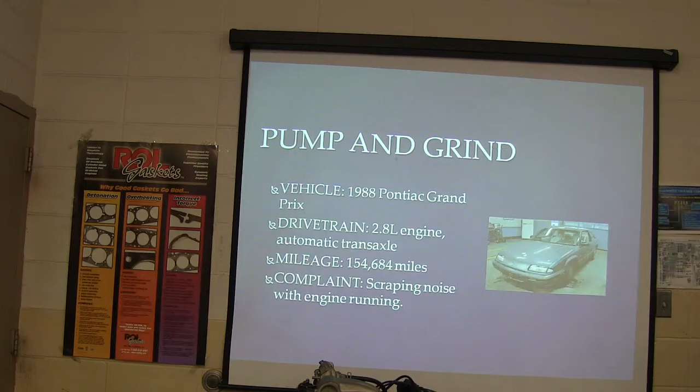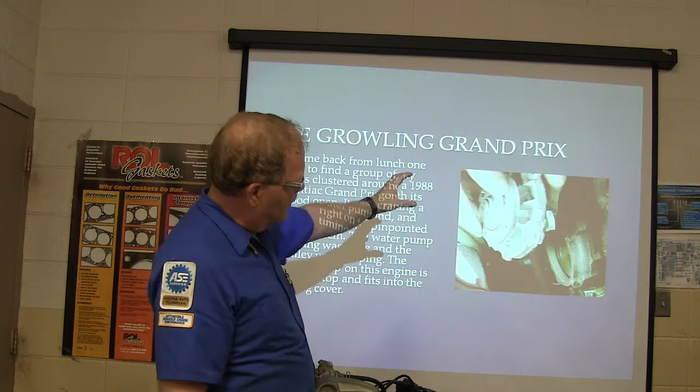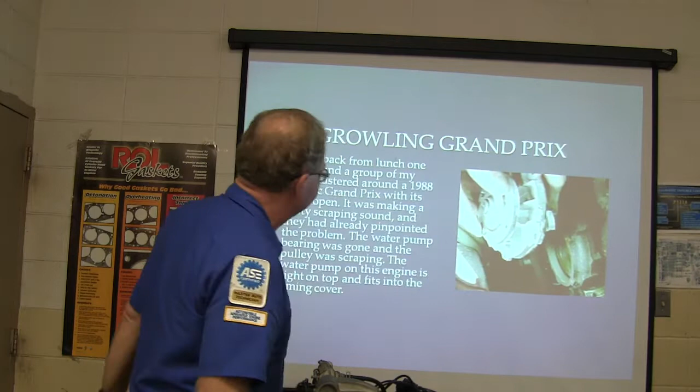The scraping noise he had was that cup-shaped pulley on the pump actually dragging on the metal housing of the timing cover, because the bearings were gone in the water pump. That's what was making that ugly sound. He had no other issues except for this noise.

Think about that now, nothing else was going on except the noise, right? So the guy gets the water pump off, takes a look at the timing cover because it spins next to the machined surface. There was a little scoring where the cast iron impeller on that water pump pulley had contacted it, but it still looked serviceable.

So we went ahead and put the water pump in there, which is right up on the top, easy to get to. You can change a water pump on one of these cars in like 15 minutes, which is real simple. So the coolant takes a little longer.

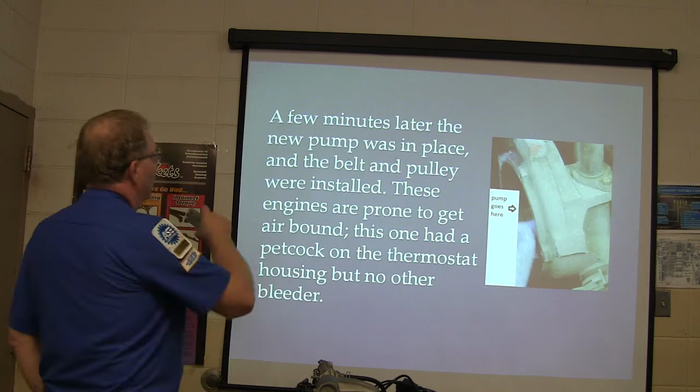A few minutes later, the new pump was in place, and the belt and pulley were installed, and these engines have got a little air-bound issue. That's why they got bleeders on them.

Whenever you're filling an engine up with coolant, make darn sure that if it's got bleeders, you use them appropriately. What the bleeders do is, you loosen them typically, and pour the coolant in until it pushes all the air out of the block and it's coming out the bleeders, then you tighten them up. You don't use the bleeders while the engine's running, just when you're pouring coolant in. Make sure if it's got bleeders, you're aware of it.

Because if it doesn't, and you remember what I told you about the Pathfinder, when you gotta put that motor in that Pathfinder and fill it up with coolant, you gotta jack the Pathfinder way up in the front, because all the air will come up to the top. If you don't, you won't ever get it all out of there. And that Pathfinder's a peculiar deal anyway.

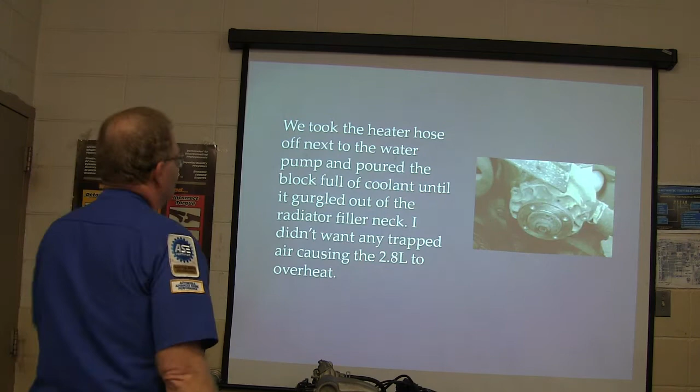So we took the heater hose next to the water pump and poured the block full of coolant. What we do is take a heater hose off, since I know it goes into the top part of the air cavity in the block. Sometimes I'll use a little funnel, pour coolant in there, holding that hose up until it fills all the way up. If you can do that, it works really well. You can't do it on every vehicle, but on that particular one, we did.

Didn't want any trapped air in it, causing it to overheat, trying to make sure everything's okay. So the owner came walking back in the shop just as we were warming it up, waiting for the thermostat to open. So how do you know when the thermostat's open?

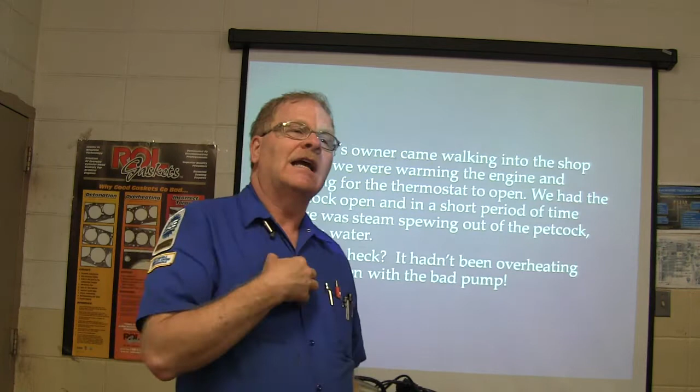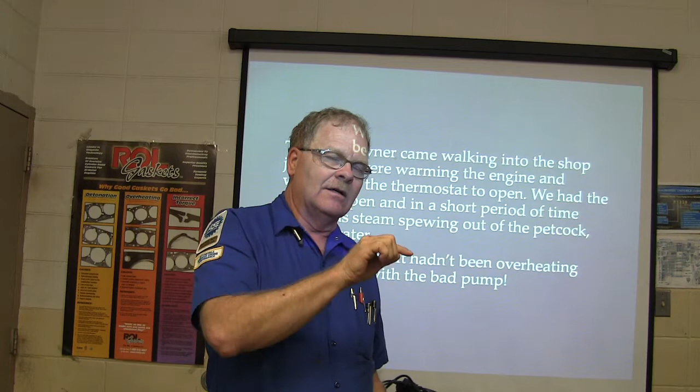Just select that and nothing else, so you have a good high resolution reading. What are you going to see on the scan tool? Just get higher and higher, and then it'll drop, and then it'll go back up, and then it'll drop, it'll go back up.

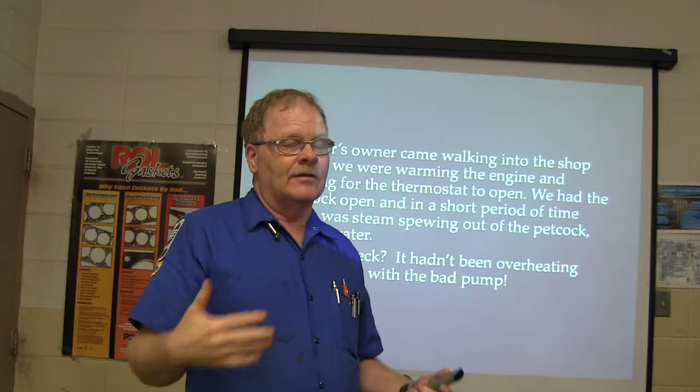Also, your coolant fan, if it's got an electric coolant fan, will kick on and off, on and off. Now what happens if you're watching your coolant on a scan tool, and the coolant fan kicks on and stays on, and it keeps getting hotter and hotter? You still have a problem.

Did you get it hooked up? No, no one's been here yet. Did you stay dry? Partially. What?

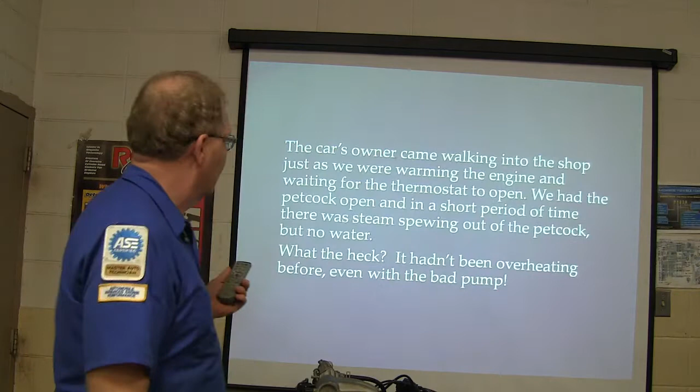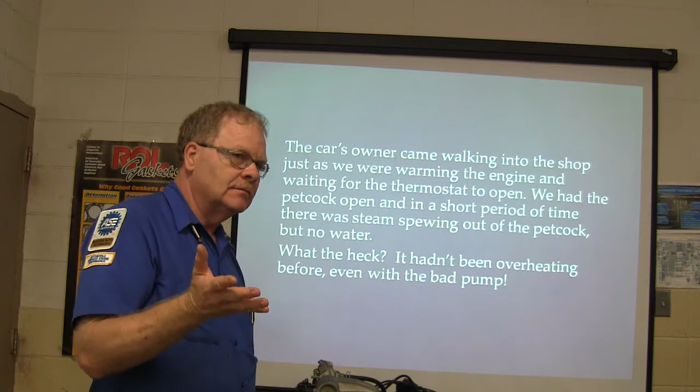It's overheating now. It wasn't overheating before we put a new water pump on it, or a rebuilt one, or whatever. We put it on there, and now it's overheating. Did we cause that? Well, it didn't overheat before, but now it is. Can you think of anything? All right, parts girl, you're supposed to know.

Because it even had the fortitude to do it, because it's a pretty tough little engine right there. The steam escaping from the thermostat didn't smell like a blown head gasket.

What does a blown head gasket smell like? You smelled one, hadn't you? Stinky sweet smell. And it's punching water out while it's sitting there running.

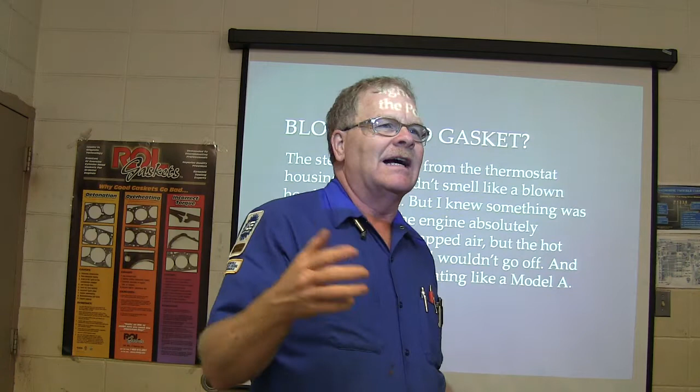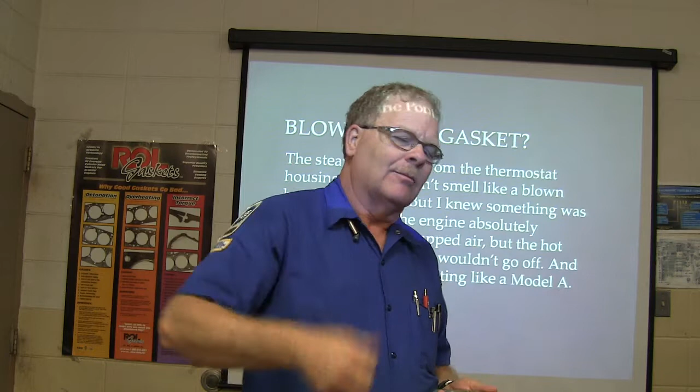The funny thing about that, when we got that Bronco, the guy said it had a blown head gasket, so he donated it to the school. It would run for a while, and it sounded like it was kind of skipping. It wasn't quite running right, but it was running almost right, but it would start punching the coolant out. And you know what I found out was going on with that one?

He had it wired up like a 302, and it was a 5.8. That was the only thing wrong with it. In other words, he wired it up 15426378. It's supposed to be 13726548. That'll be on a pop test tomorrow.

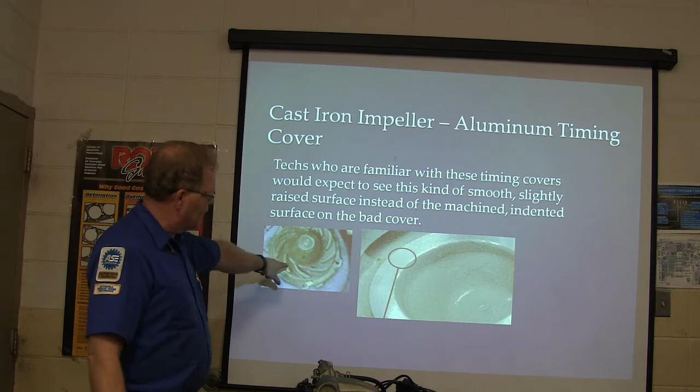But it was percolating like a Model A. So anybody that's familiar with these timing covers would expect to see this smooth, slightly raised surface instead of this machined, indented surface on the bad cover. See, this thing right here had a cast iron impeller, and because the bearings were worn out, it got in there too close and it chewed away some of the metal.

And so what we had, I remembered as I was thinking about this, back when I was working at Lincoln Mercury in 1984, this guy had this little Dodge Aspen, like the one you see in the picture there. He was a bookkeeper in the office, and so the seal was leaking and all that, so we ordered a water pump from the parts house. It was a little slant six, and I popped it in there.

And he came back and he said, my car's running hotter than it was before. Well, it had been running down, you know, kind of just above the cold line, which is where he wanted to see it, but now it was up in the middle. He said, I don't like it, before I said, well, it's full of coolant and everything. So anyway, he was insistent, he didn't like that.

So I pulled the water pump off of it. And on that particular one, there's two different types of water pumps, the way they're put together—basically two basic different kinds. One of them has the impeller pointed at the timing cover, and the other one has the impeller pointed at the pump, the blades of the impeller. There's some water pumps up there behind Nick.

But anyway, so what I did was when I pulled the water pump off and I looked at it, I was noticing a gap that looked a little bit wider than it should. It wasn't anything that would jump out and grab you, but I said, that looks like too much of a gap. So I got him to order another pump from the parts house, and there was about 50 thousandths of an inch difference between the first water pump I put on and the second one he sent. When I put the second water pump on, it ran cool.

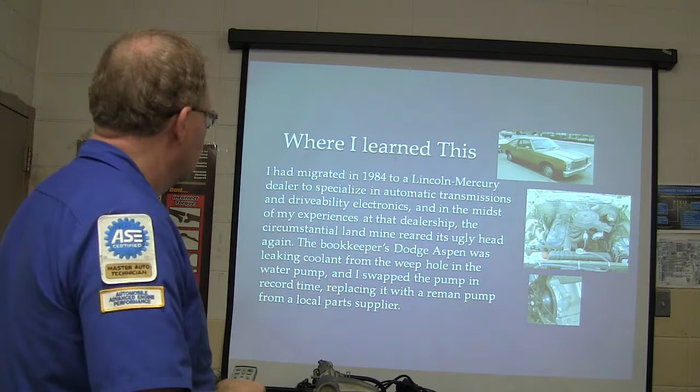All right, well the next day he showed me that temperature gauge. I test drove it and it ran between the midway point and the hot line, which wasn't gonna really hurt it, but he didn't like it running that hot.

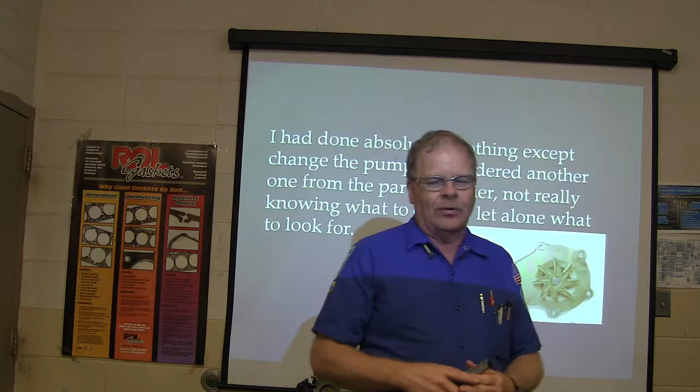All right, so what happened was when they rebuilt the pump, they pressed that impeller onto that shaft, and they didn't press it on there far enough. That's what the problem was. All right, so it was the difference—there was 70 thousandths of an inch from when I measured it with feeler gauges.

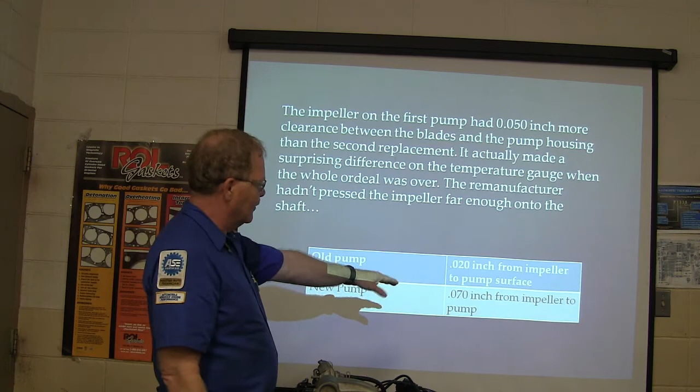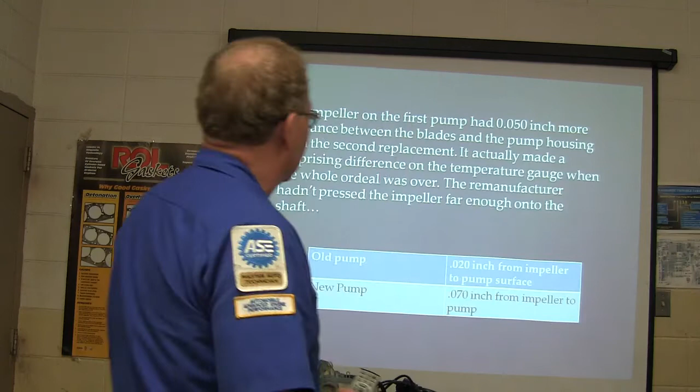You had to stack them to get that much—20 thousandths of an inch on the old pump, and on the replacement pump that was better than this first replacement pump. Now, this is something right here that will also happen in a situation where the water pump has been consumed partially by rust. Now, right over here behind Nick, this is a water pump right here that has been destroyed by rust, and there's too much space in between that impeller. Pass that around.

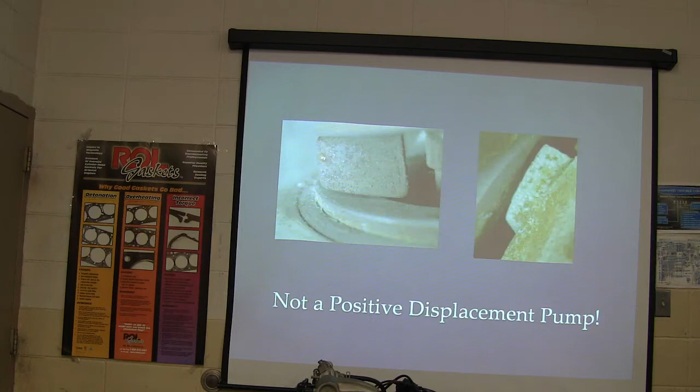Look at it. Now the way we found that particular one, that came off of a Ford Taurus. It wasn't running hot, but she was complaining that she had no heat. See how the rust has eaten away that impeller? That happens when somebody doesn't keep their coolant changed, or if you've got a bad radiator cap letting air come and go. It just makes a big, terrible mess of the cooling system. Long and short of it, she said, I've got no heat.

So what we did is we put a clear hose in the line between the two heater hoses, and we cranked it up, and there was no coolant traveling through there. The water pump is what pushes that. Okay? She's holding that up.

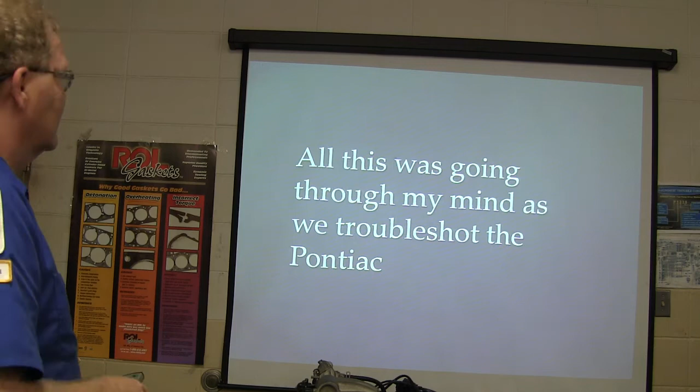This was going through my mind the whole time we were troubleshooting the Pontiac. I didn't really have a frame of reference. That looked just fine at first glance, but I found the worn out part had too much space there.

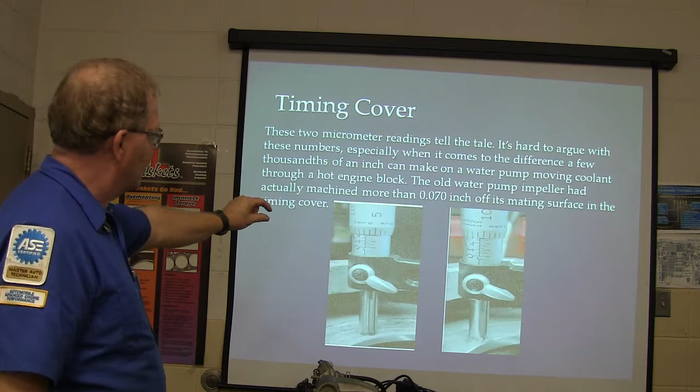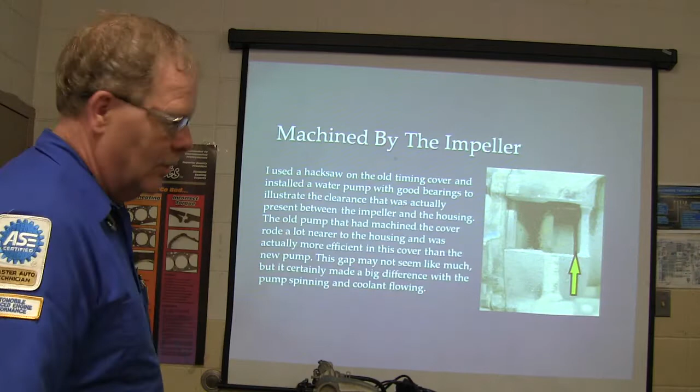So I got a micrometer, and I don't know how accurate this would be, but I noticed that this one here, when I got another timing cover off of an old engine we had back there that was the same kind of motor, look at the difference. See how much thinner that one was, ground off, and that one was smooth, and that one was kind of chewed up. But the water had lubricated that thing while it was machining it, to the point where it really didn't look that bad. So I used a hacksaw on the old timing cover and put a good water pump on it.

And you could see all that space in there.

Now, what is the difference between a positive displacement pump and a pump that's not positive displacement? Different displacements, huh? No, it's not that. Positive displacement means if you turn that pump, something's going somewhere. And if you stop whatever it is going, the pump will stop. Got it? You understand what I'm saying?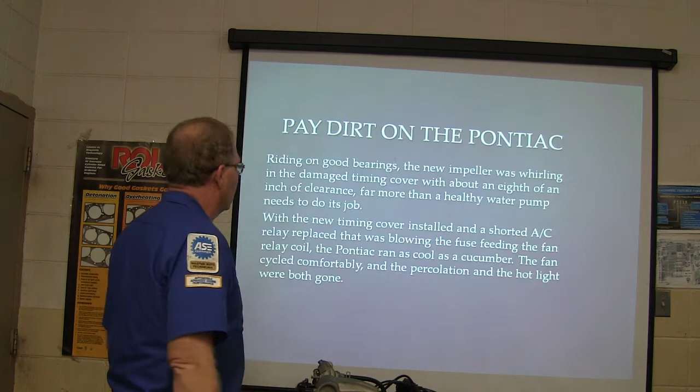But that one right there was a good one to keep. May not seem like much, but it made a big difference with the pump spinning and the coolant flowing, riding on good bearings. The new impeller was whirling in the damaged timing cover with about an eighth of an inch of space, but with the new timing cover it was a heck of a lot closer than that. That was the point.

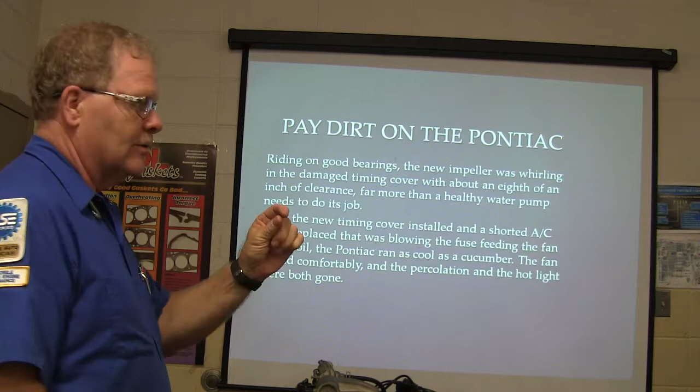Now, the ones that teach us the most are typically the ones that smack you around, the ones that you had trouble figuring out.

Now y'all are getting the sugar out of it, that girl brought her Armada in here, somebody put sugar in the gas tank. She was nasty about it. After you got the sugar out of the gas tank, how much did you get out of it? About a cup. About a cup of sugar out of it. Now, sugar won't dissolve in gas, so all it does is clog up the filters.

But she was saying she couldn't get about half a tank of gas in there, it was clicking off, but that was because the sugar they poured in there was clogging up the pipe going in. And that was a lot of gas in that tank though. You said y'all act like there wasn't much in there yesterday. Well, the long and short of it was, it's hard to tell when it's balancing on that jack, but it was a lot.

But I will tell you something else, you can't hit that tank and tell what's in it. I can't hit a gas tank and tell if it's got gas in it or not. It's not like water. She wasted all that money, because that had to cost her a good bit of money.

Well, not necessarily. What we would do is filter all that sugar out. She can still use the gas. Oh, really?

Yeah, because it doesn't dissolve. So, put some sugar and gasoline in a fruit jar and shake it around. It just settles to the bottom. It don't even dissolve. It ain't like water.

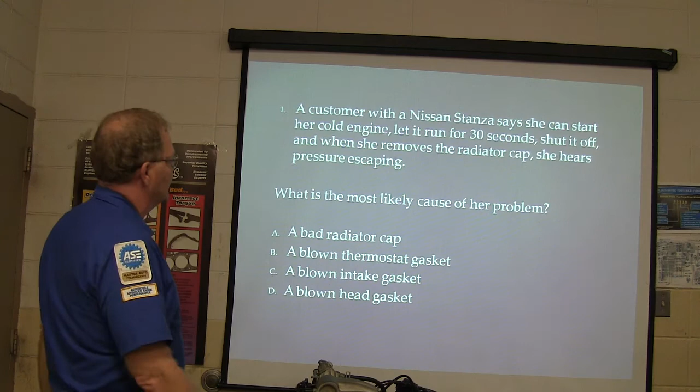All right, number one question. A customer with a Nissan Stanza said she can start her cold engine, let it run for 30 seconds, shut it off, and when she removes the radiator cap, she hears pressure escaping. It's been sitting all night, she starts it for 30 seconds, switches it off, takes the cap off, and there's pressure. What does that mean?

It makes pressure in the cooling system within 30 seconds after starting it when it's been sitting all night. Come on, intake gasket? Where would pressure come from that quick in the cooling system? Thermostat, radiator cap? No, the radiator cap's trapping the pressure, but the pressure's coming in there from somewhere. Where's it coming from?

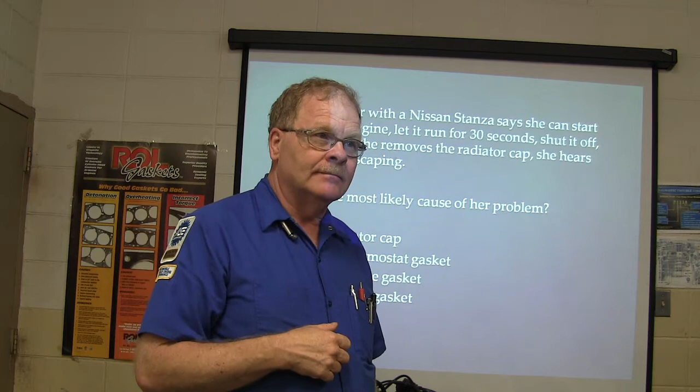Head gasket. Head gasket. Listen to Sierra, we got head gasket issues. Now, how many different ways can head gaskets blow? Do they always blow the same way? Nope, sometimes they blow between two cylinders.

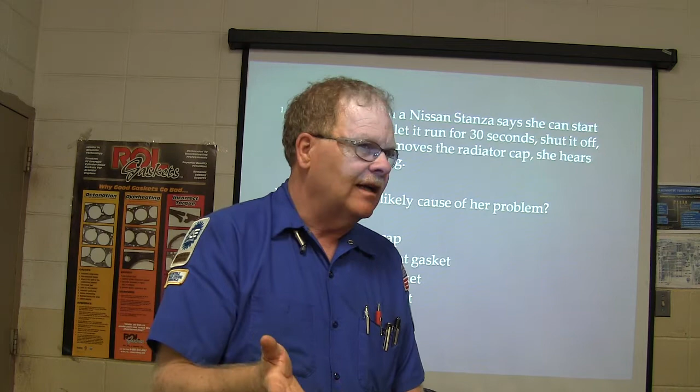Sometimes they leak oil if it's an overhead cam engine with the camshaft spinning in its saddles. If it's not overhead cam, it won't leak oil from under the head typically. It can leak coolant from under the head, but it can also leak coolant into the cylinder, or leak compression into the water.

Now let me ask you this. How are you going to find it if it's leaking coolant into the cylinder, and what kind of symptom does that cause? Smoke? No, it depends. If it's like this Dodge truck out here that's really getting a lot of coolant in there, remember the one we started up, the guy brought over here?

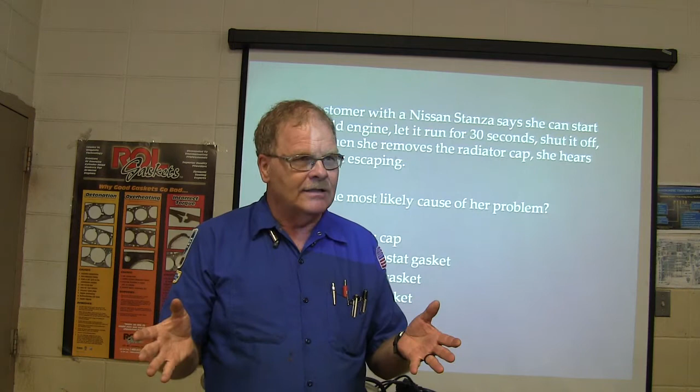It's going to have an engine with lots of coolant coming out there. The reason we're putting an engine in the Dodge truck is because the timing chain costs $500 something for a Dodge, for an engine like that. By the time, we don't know if he's got cracked heads or anything else, we may as well just pop another motor in it instead of taking it down and spending $1,800 putting the timing and all this other stuff on that motor there.

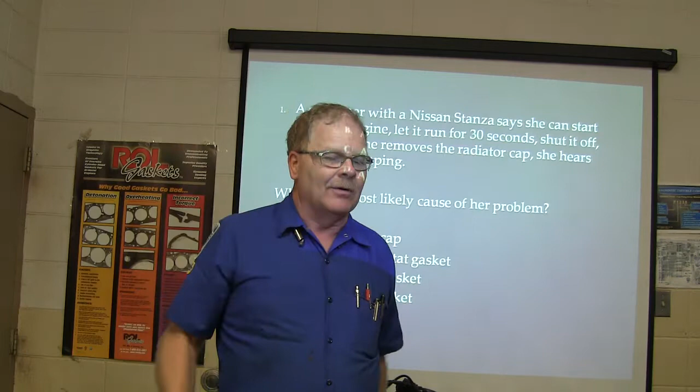But the long and short of it is, a lot of times you'll have one that, whenever you park it and go get your bananas or something after driving it a long way, you come into the parking lot, crank it up, and it's skipping for just a minute and then it clears up.

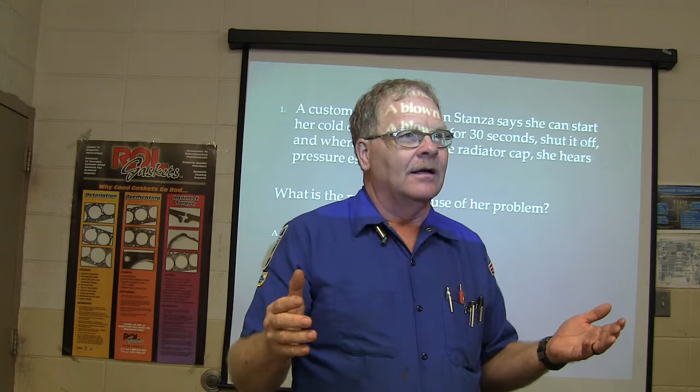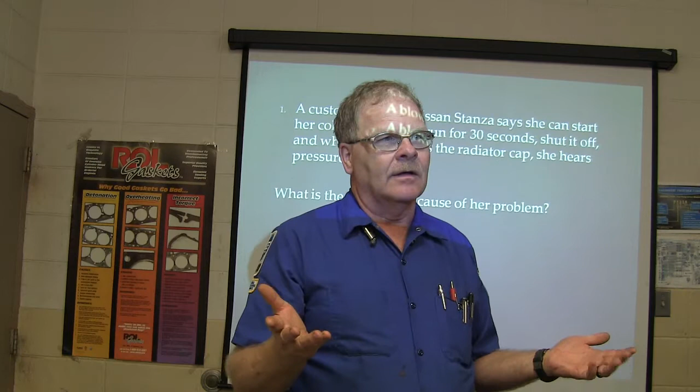Okay, well what do you do to find that? How do you find out what's wrong with that? That's what you're here to learn, right? I was telling Nick the other day, you may want to do high performance stuff, but if you don't understand the regular motor stuff, you got no business fooling with a high-performance engine unless you understand how the motor in Mama's minivan works. That's why we teach the basic stuff about engines and all that.

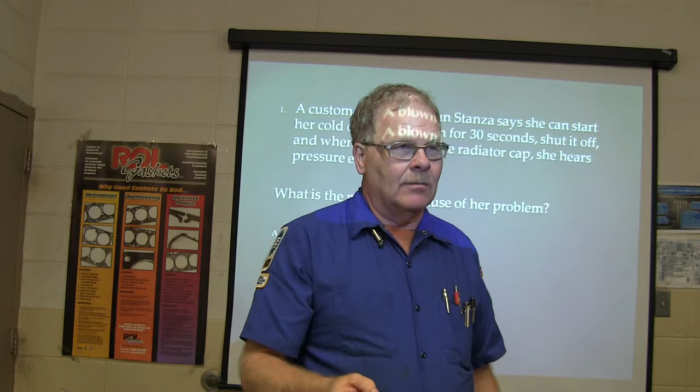Okay, I'm gonna crank it up. I'm gonna shut it off while it's still skipping, I don't wait till it stops. If it's still skipping, I shut it off. Then I pull all the plugs out, and one of them will have steam boiling off of it. We got a head gasket issue, you know what I'm saying?

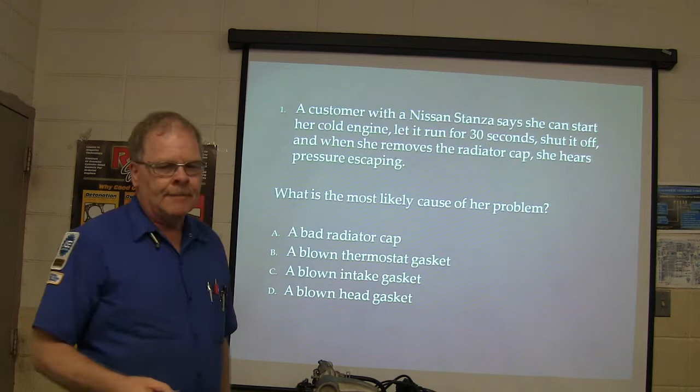But anyway, long and short of it, this is the blown head gasket, right there. So what if you find steam coming off the plug, or if the plug looks rusty, like it's been really rusted, like it's been out there in the water, and it shouldn't look like that when it's been in the cylinder, should it? Sometimes you'll see little green stains on it where antifreeze has gone to it and cooked onto it.

Now, here's another thing. If it's skipping like that, and when you first start it and pull it out and it's wet with gas, or it's really, really sooty, what does that mean? You got a dripping injector. So there's a couple of different things that can make you do that.

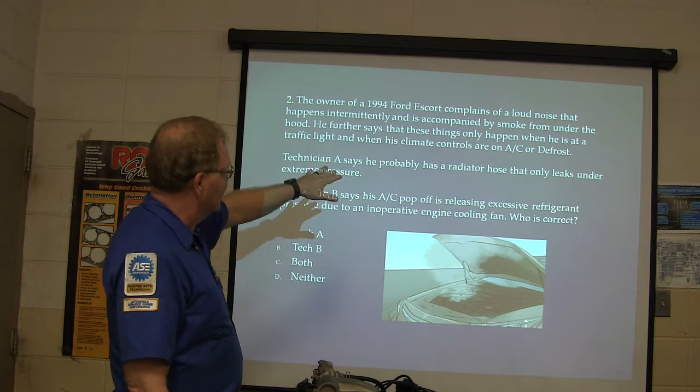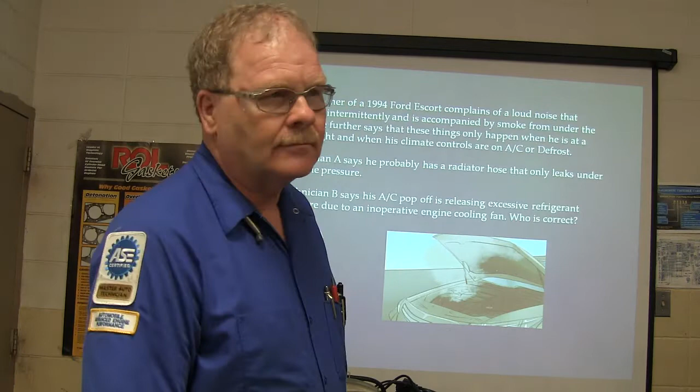Now, the owner of a 94 Ford Escort complains of a loud noise that happens intermittently and is accompanied by smoke from under the hood. He says these things only happen when he's at a traffic light and the climate controls are on AC or defrost. Technician A says it's probably a radiator hose that leaks under extreme pressure. Technician B says the AC pop-off releases excessive refrigerant due to an inoperative engine cooling fan. Which one is right? Technician B.

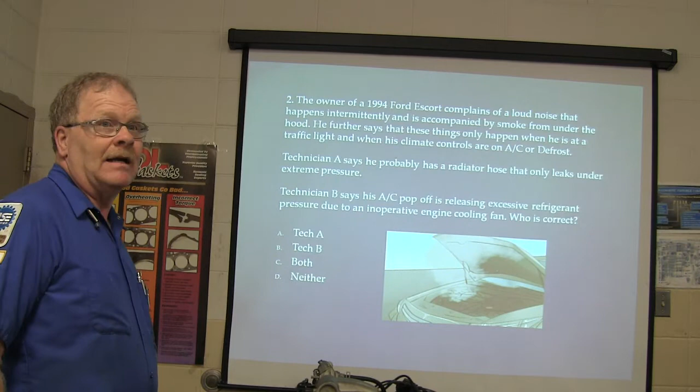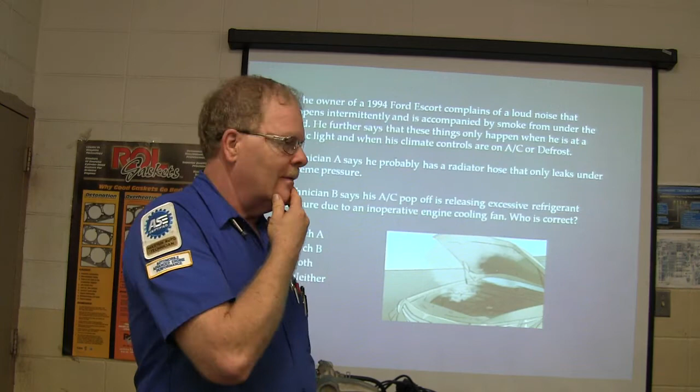That's gonna be a B. Usually it'll overheat, but sometimes it may not. But if it's on a hot day and you park it, and that head pressure gets up high enough, there's a pop-off valve on the compressor that releases extreme pressure. I've seen that happen. And the problem with all of that is you may pull it into your service bay and that fan may kick off and on repeatedly and never act up.

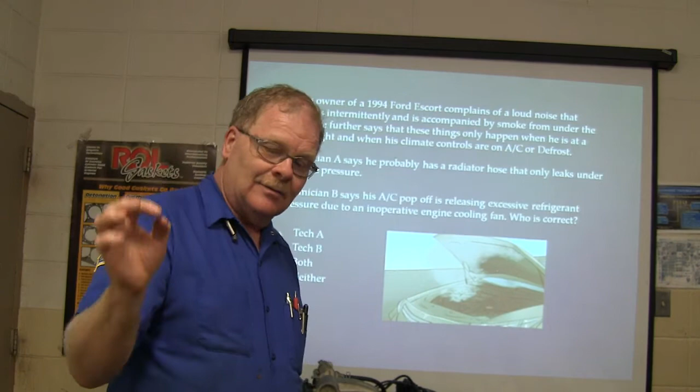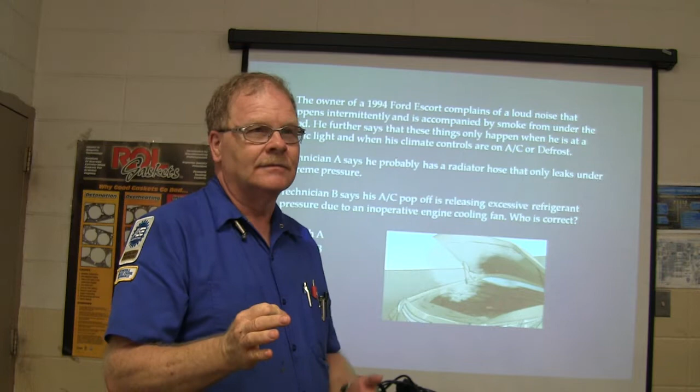That's when, like we did last semester, you pull the relay and hook a test light, kind of like we were talking about. You go from the hot battery terminal into the part of the relay that goes out to the fan, and while that's there, I turn the fan on and see if that light ever goes out. If it ever goes out, it's like Russian roulette. When it stops, if it stops on that dark spot, that fan won't kick on. You know what I mean?

I troubleshot one that was doing that on a Tempo, and we wound up finding it that way. And then I started teaching people to do that.

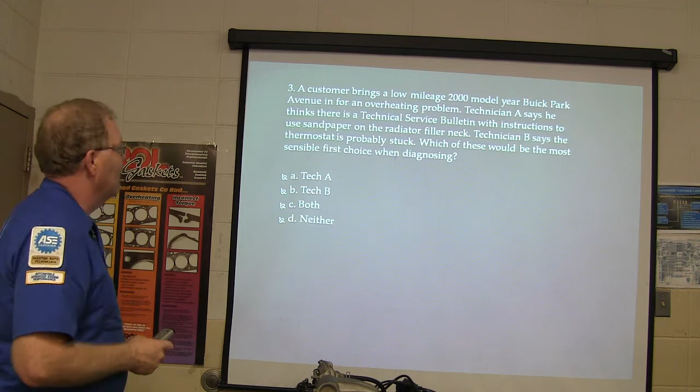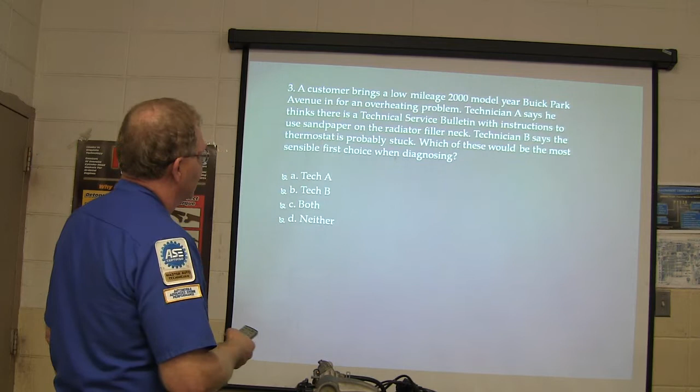Customer brings a low mileage, 2000 model year Buick Park Avenue in for an overheating problem. This was an old situation you're probably not going to encounter nowadays, but you can, and I'll tell you another little story in a minute that leads this way. Technician A says he thinks there's a TSB with instructions to use sandpaper on the radiator filler neck. Does that make any sense? Technician B says the thermostat's probably stuck. Which of these would be the most sensible first choice when diagnosing?

There's a TSB. It says to use sandpaper on the radiator filler neck.

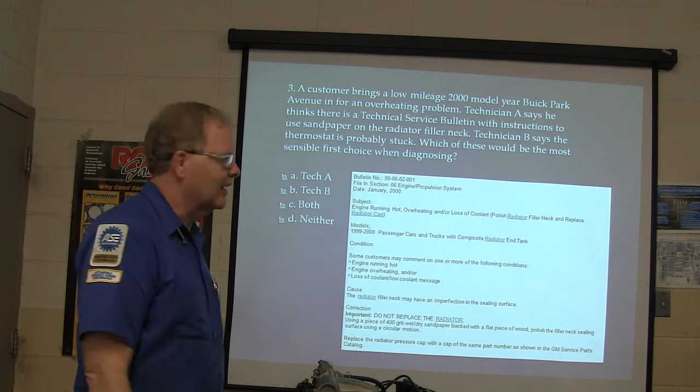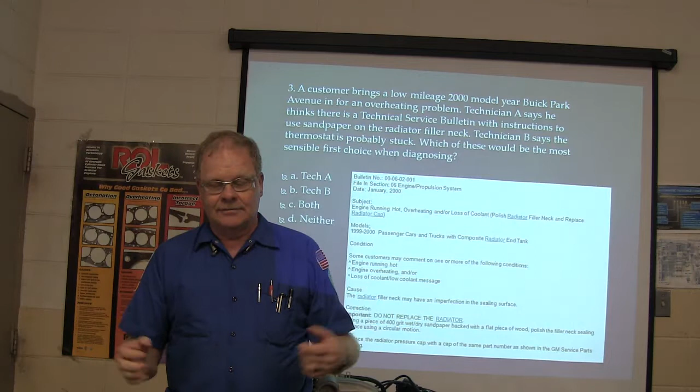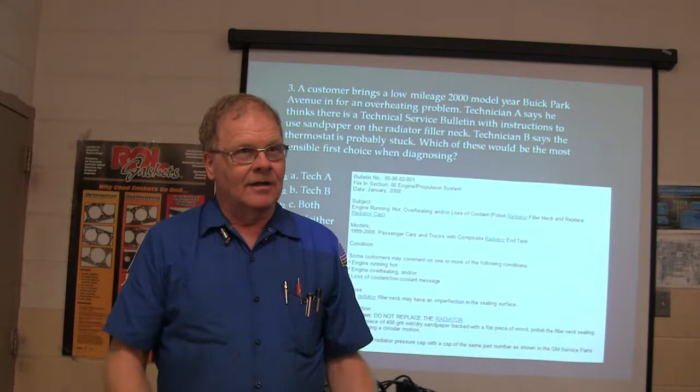Here's something else though. A Dodge Caravan comes in here, and we put a radiator in it. She's driving it, and she says it tends to want to percolate and push coolant out, and she winds up having to add coolant all the time. Now the coolant's not leaking from anywhere else, but it percolates. So I took the radiator cap off, and I noticed it didn't take a lot of effort, whereas most of the time radiator caps, you've got to really work to take off. I got looking, and the way it was designed, it came from Advance. There's nothing wrong with Advance, I'm not fussing about them, except now it takes them too long to get parts there. But it came from Advance, and the good thing is it's a lifetime guarantee. So, anyway, I said this thing does not have enough pressure, so I got another radiator cap, and it was the same way.

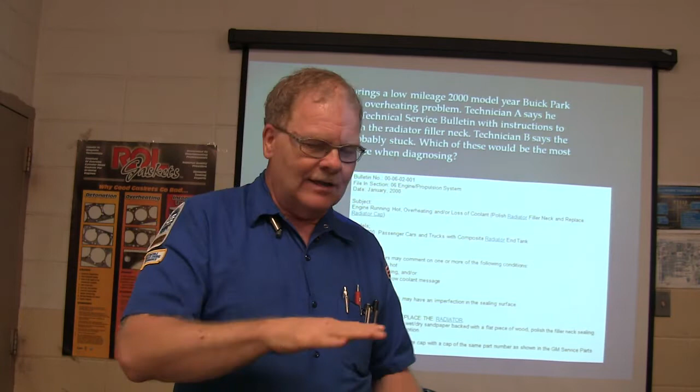And I said the radiator wasn't quite made right for that cap -- I mean for the outside seal that goes on the top. It wouldn't bite good enough. So I got another radiator cap I had with a good seal on it, fed it around there, and put it underneath that seal to make that rubber seal about twice as thick. I said, let's just see what this does. And it never percolated because it had more pressure -- it was able to hold more pressure, you see what I'm saying? That was an improperly built radiator, is what that was.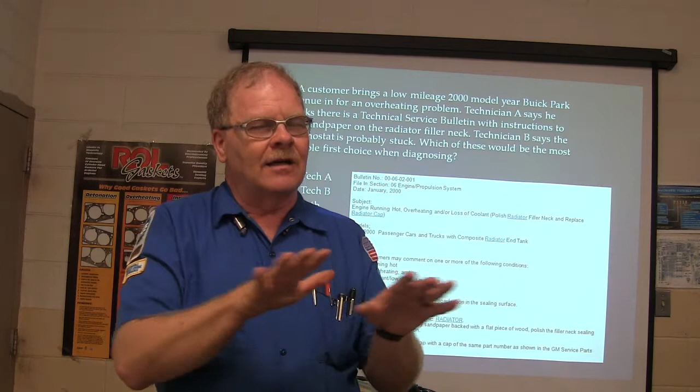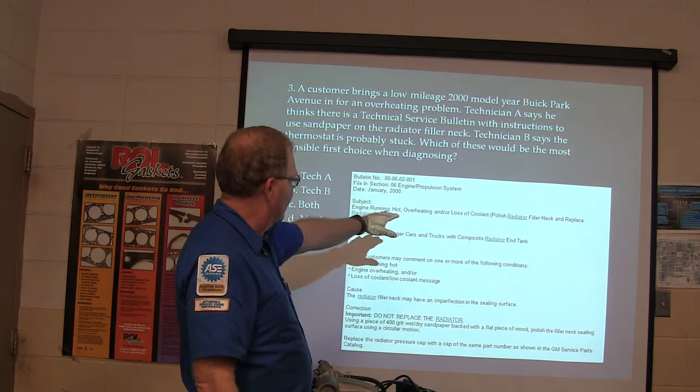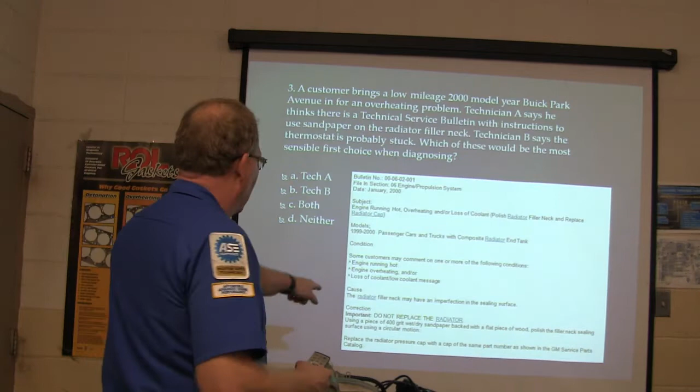So, but anyway, this one here is kind of interesting, the one I was talking about. This is a TSB: engine running hot, overheat, loss of coolant -- polish radiator filler neck and replace the radiator cap. Basically it had little casting imperfections in it, and they wanted that sanded away. Do not replace the radiator. They didn't want to pay for a radiator replacement under warranty because it's expensive.

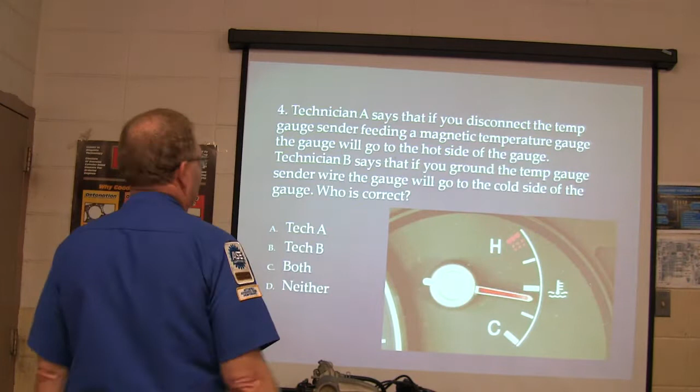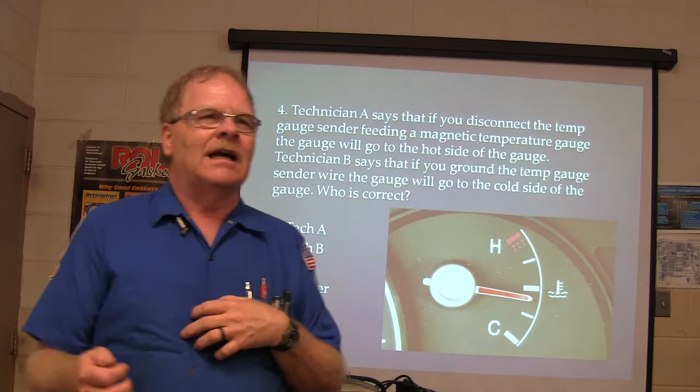Technician A says if you disconnect the temperature gauge sending wire feeding the magnetic temperature gauge, the gauge will go to the hot side. Technician B says if you ground the temp gauge sending wire, the gauge will go to the cold side. Now how do you check that gauge? Well, sometimes my gauge ain't working right. This is a magnetic gauge directly hooked to a sending unit under the hood. Nowadays a lot of them have computers in the instrument cluster and stuff like that.

But if you take that sending unit wire and ground it, what are you going to see the gauge do? It goes hot. Now, if you disconnect it, it goes cold. If you ground it, it goes hot. Now on a gas gauge, typically, if you disconnect the gas gauge sending unit, it'll go past full. But if you ground it, it goes to empty. You need to know how that works when you're troubleshooting.

If somebody can't trust their temperature gauge, they don't know whether it's getting hot or not. And most of the time, whenever you've got an engine that's trying to run too hot, I don't know how many times I've seen people beside the road with a busted radiator, you know, plastic radiators, how they'll just bust.

Sometimes somebody will come to me like this lady up front, she says, I've got this car that's got 275,000 miles on it, what do I need to do to get as many more miles out of it as I can. One thing I recommend is let's put a radiator in it, because when it's got that many miles on it, and it's been hot under there that many times, that radiator is liable to split. And if it splits the wrong way or in the wrong place, you could be putting a motor in it, or it could destroy it, because you're not going to put a motor in a high-mileage car like that anyway, not most of the time. Just make sure you understand how that thing works, and a lot of times you can look in your manual and it'll tell you what the gauge is reading at this temperature versus that.

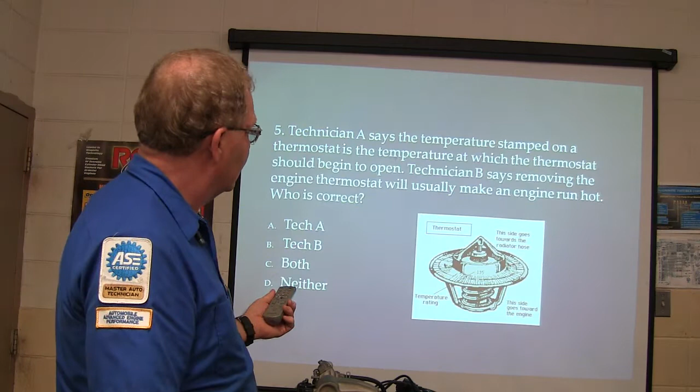Technician A says the temperature stamped on a thermostat is the temperature at which the thermostat should begin to open. Technician B says removing an engine thermostat will usually make an engine run hot. Who's right?

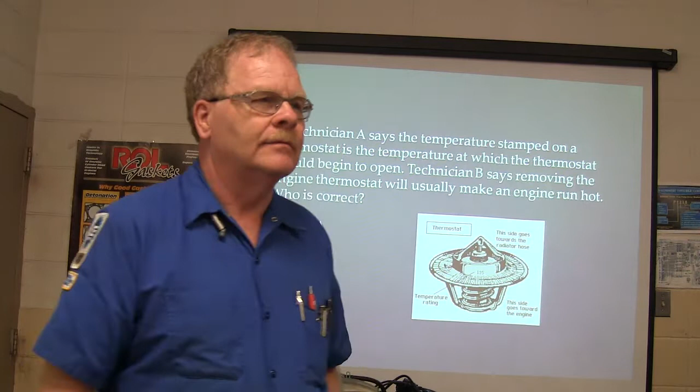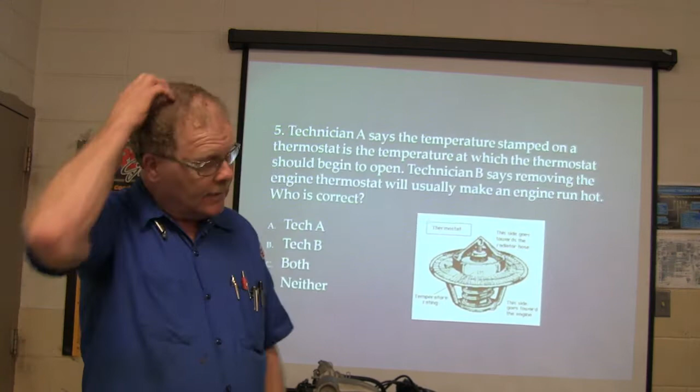If you remove the thermostat, it won't run hot, it'll run cool. Technician A is right just about all the time. There are people I've run into though that will argue with you like you were a fence post and tell you, oh no, it'll run hot if you take the thermostat out, which is stupid.

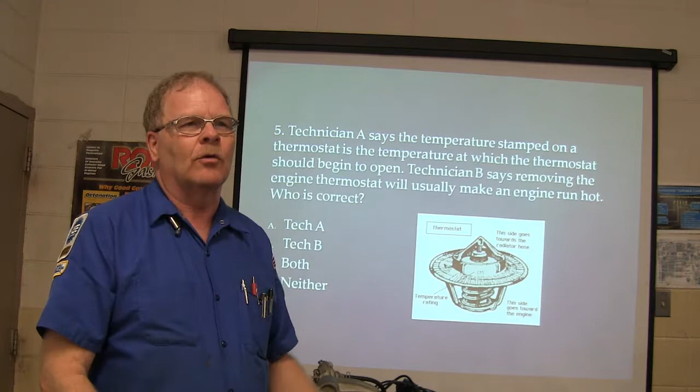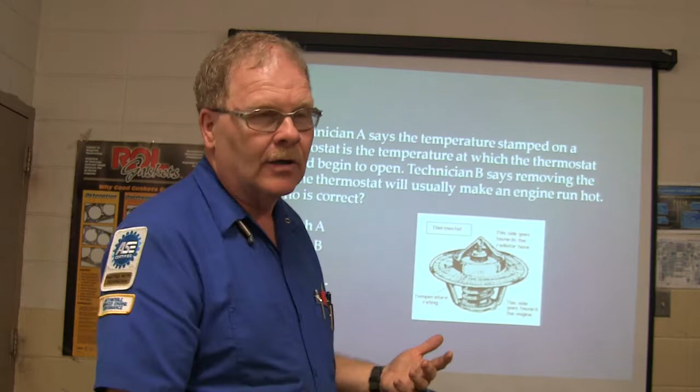But if it's an old car, like some of these old Mustangs from the mid to late '60s that had real thin radiators in them, the coolant wasn't spending enough time in the radiator to dump its heat if the thermostat wasn't in there. Sometimes you take a thermostat out of 550 cars, one of them might overheat, the rest run too cold. If the thermostat sticks open, or if the spring gets weak and it opens too soon, if it's running too cold the heater won't work. That ain't good for the motor either, emissions are higher, all that kind of thing.

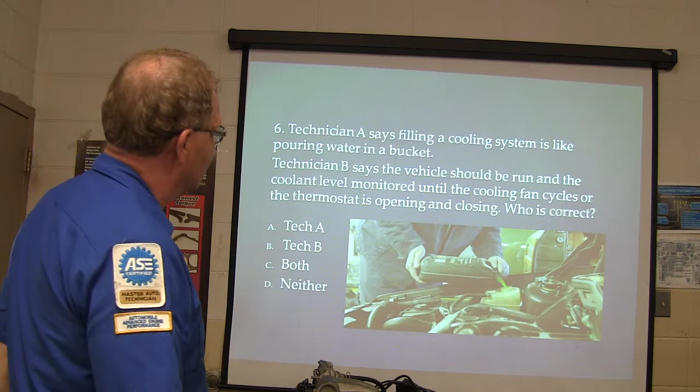Technician A says filling a cooling system is like pouring water in a bucket. Technician B says the vehicle should be run and the coolant level monitored as the cooling fan cycles on and off until the thermostat opens and closes. Who's right, A, B, or both?

You're saying it too fast. Yep.

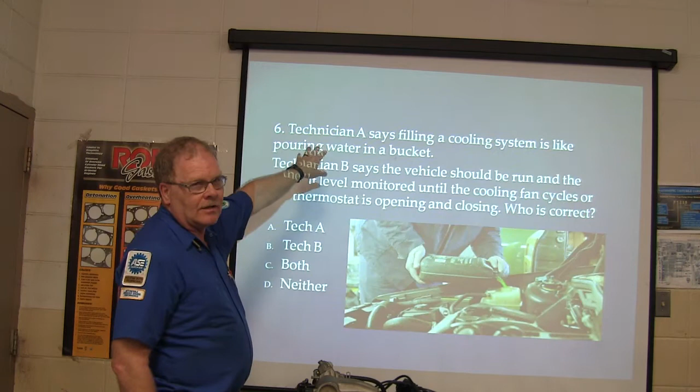Let's look at technician A, is he right? Filling the cooling system is not like pouring water in a bucket, is it? You better let that thing run long enough to make sure it's full.

There was a guy here that put a radiator in his own vehicle after hearing me say this over and over, and he was in such a big hurry that he poured it in there and could see the coolant and figured he was good to go. It was like a GMC SUV or something, mid-90s. He took off on it, got out there somewhere, and it started trying to overheat. He was dingy enough with it trying to overheat that he took the radiator cap off, and it got coolant all over it.

Be careful about that too. Squeeze the hose and see if it's tight before you pull the cap off. If the hose is tight, you don't pull the cap off, you got me? That's why some of those parts are called lever vent caps, that way you're not going to get burned, and if you pop that lever vent, it'll release the pressure. A lot of Escorts and stuff now have the cap pointing away from you, because they don't want you to get burned. We had an Escort come in here with a blown head gasket, and when we took the radiator cap off and spun it over, it fire-hosed that coolant out all over the back of the car. When you spin it over, whoosh, you know? But if it's pointing in the wrong direction, it's gonna get you.

All right, that's the last slide. Anybody learn anything you didn't know before you came in here? You learned something, didn't you? Yeah, I did. All right then.

Nick was over there turning into a skeleton. Usually Kayla's the one that turns into a skeleton. Today it was Nick, is that right? It's cold in here, that keeps you awake.